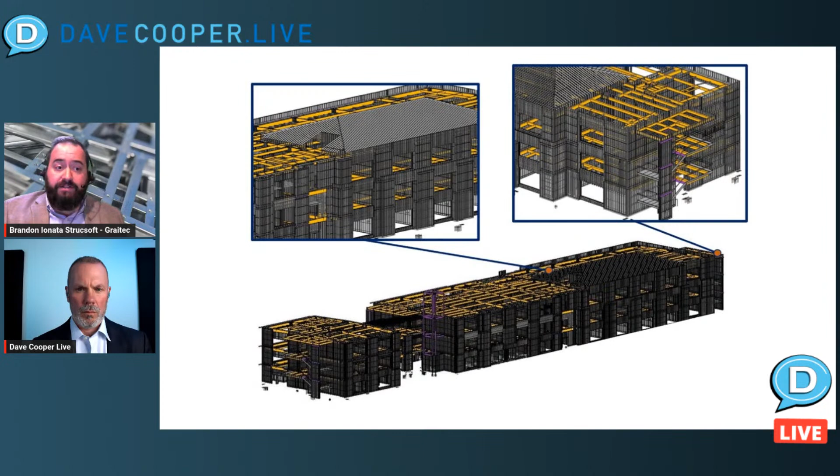Yeah, so any customer that's using MWF, essentially what they can do is we're leveraging the technology of Revit. So if we can import it into Revit, we can see it in MWF, we can frame around it, or we can create openings if there's in-wall penetrations such as hot and cold water pipes and so on, and we want to make sure that there's already holes drilled through the verticals so that we can pass those pipes and not have to do it on site. So all of that can be done.

This is the augmentation of the level of detail I was speaking to earlier, right here. I mean, amazing. It is super detailed. My guess is we can zoom in down to the last screw and bolt on that, right? Essentially, yeah, you have to figure that every single one of the connections of these members are precise enough that we can manufacture them in machine.

This particular project is manufactured through a Howick machine, funny enough. So that means that we have to essentially make sure that all of the information is there so that the Howick machine knows where to cut the stud, where to punch the hole for the screw and dimple, where to swage and where to create lip cuts so everything fits nicely inside of each other.

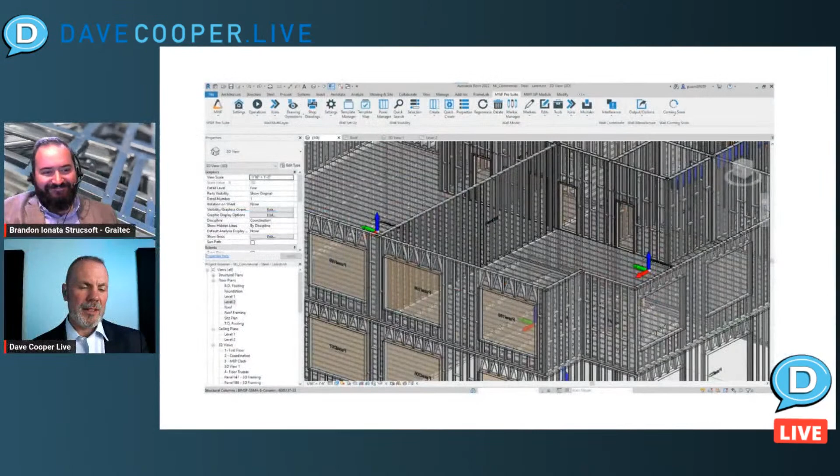Just another view of a different building, but what's interesting about this one is that this is all cloud-based. So this is Onyx, and it's our manufacturing solution. About six or seven years ago, we realized that a lot of the fine detail, so here we go again talking about routing lines for cutting sheathing or glue lines and screws and so on, a lot of the fine detail inside of a Revit model isn't necessary, right? So we saw a need to kind of extract the manufacturing process a little bit from Revit so that we can run it in a lighter and more accessible

platform. So we created our cloud solution called Onyx, and essentially what this is at its nucleus is a converter, right? So we're taking a Revit model, we're bringing it up to the cloud, we're able to see the entire model like it is here, and we output the CNC file. More importantly, though, what we're doing is we're really organizing the way we're manufacturing these wall panels, right? So what do I mean by organizing?

Well, obviously, in this view, I'm able to go in here and sequence our roll order. So roll order in the business is what panel goes after the other, right? So it's our sequence of manufacturing. So I'm going to sequence our roll order here. And from the roll order, I can then go even further and I can sequence what materials are used first, what members are put out first.

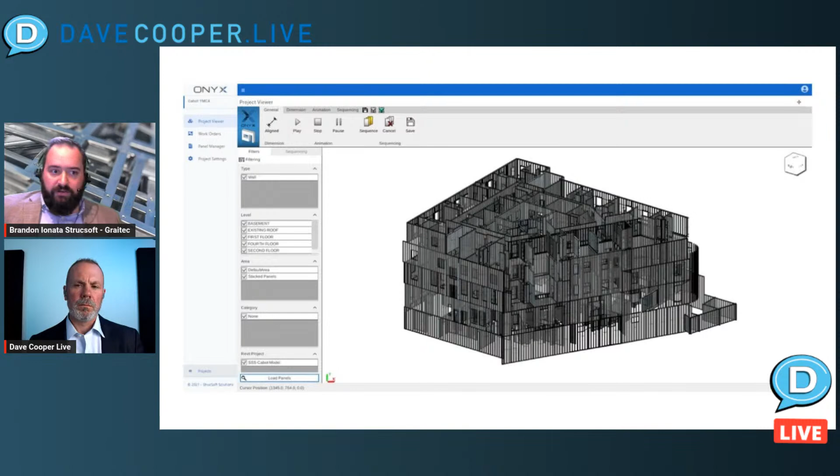And we're able to edit the operations. Now, everybody always asks me, okay, we're editing something in the panel, is that going to go back to Revit? Well, I don't need to. If I change the location of a dimple, for instance, on a stud, I don't need to send it back to Revit because it doesn't exist in Revit, right? It exists for the purpose of the machine and the machine only. So we're able to do all of that from Onyx. Wow. Very cool.

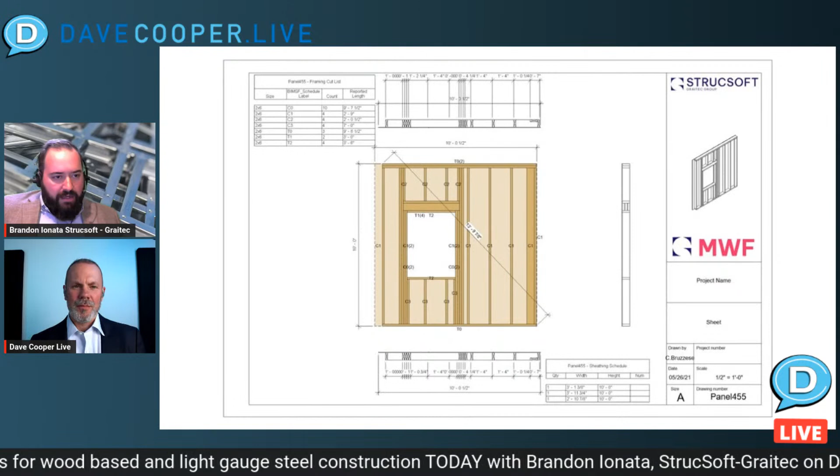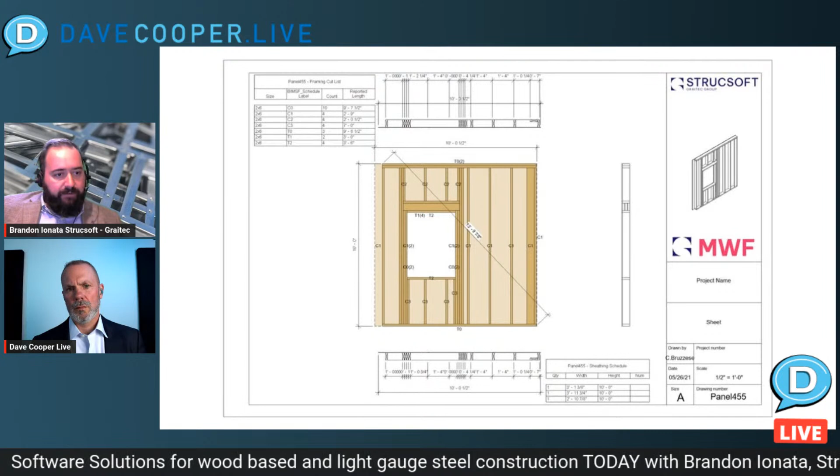These are wood, right? My favorite. This is wood. A pretty simple panel, to be honest with you. I probably could have found something a little bit more complex with some MEP in there, but either way, I think it demonstrates the necessity of software like ours in the industry. Because if we're creating something offsite, we need shop drawings or panel tickets like this. If you're going to build something in a factory, I need a visual aid to show the guys putting this together which member goes where, which piece of wood goes where, and what this panel is supposed to look like when it's done.

I also need to be able to relate my labels coming off the machine to the actual physical labels on each and every single piece of the puzzle. So a shop drawing like this is super important. If I go back 10 years, people were drawing each and every one of these by hand. That's a lot of time consumed. Here we're able to create these automatically through the software. You input your settings on how you want this to look, the visual appearance, and we're able to spit this out for every panel in your project.

So your software is going to be working with Randek machines, right? Or something of that scale. Exactly. The quality of the lumber you have to use with precision software has got to be something you take into consideration when designing. The machines aren't sitting there flipping to find a crown and seeing how inaccurate the stud is, and the 5 from the 20 go in that pile, right? How do you guys manage that, or is there a specific wood grade that you need? You definitely need a high grade wood.

If I look at some of our customers, especially on long lengths like top and bottom plates, a lot of them are using very high grade finger jointed plates that are arrow straight. And there is an additional cost to this, don't get me wrong. But the benefits are reduced waste and reduced labor on these projects. They're saving money by purchasing this material. And you're also looking at the final deliverable, the product quality. When things are fitting together real nice and you don't have wonky lumber doing an S curve through your wall, your final deliverable is much higher grade than your competitors. So it's really a benefit.

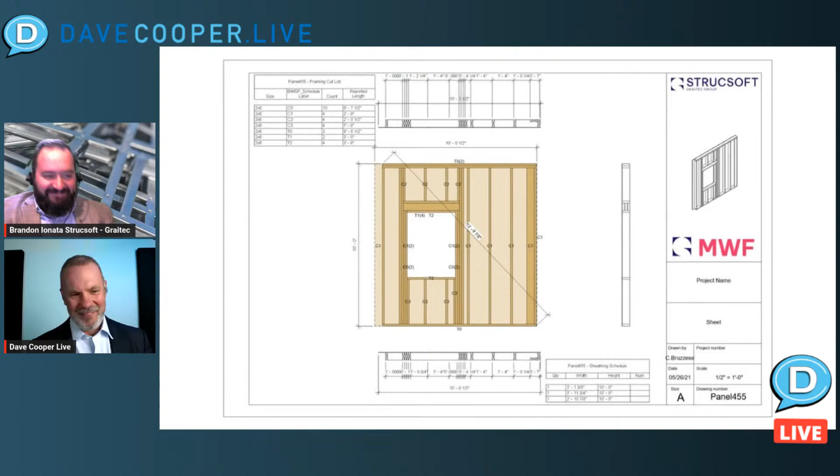There's a good example of a multi-story wood structure, and we have images of much bigger ones, but they're hard to keep on one screen. But you'll see, when we talk about framing, it isn't just the sticks of lumber. We're also talking about the sheathing components. We can obviously design closed panel systems, so framing at that point includes hardware. In structures like this, we obviously have all manner of clips, and hold downs, and anchors, and so on. But also MEP components if we're delivering closed wall systems. So framing is more than just the wood or the steel verticals.

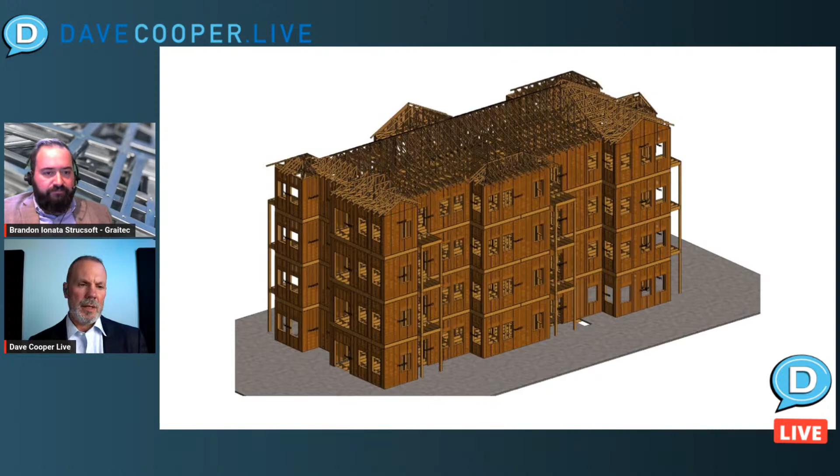Yeah, it definitely is. And the fact that you can also incorporate the MEPs into the wood structure, that's always been an issue in the past. But with technology, it's becoming easier to do that. Absolutely, and this has been the big strength of MWF, really, the fact that we're built on top of Revit, right? We can take all of the data from other trades and bring it into the model, and we're able to then leverage the data and manipulate the framing so that everything works together. If we look at competitor solutions, they don't have that ability. They're dealing with IFCs, which are questionable at best. And here we're all able to play in the same sandbox and work on the same project at the same time. It's really a huge plus for us.

Like I said, I don't want to sound like a fanboy here, and this is definitely not paid promotional stuff by any stretch with Brandon and StrucSoft. This stuff is real, and that's one of the benefits that we've had at Dave Cooper Live: we get to meet the people in the field and the manufacturers that are doing this. And I struggle with how do we get other people to really understand the financial gains that one makes having the accuracy that these systems give. And yes, you got to pay a little bit more for the product, but you got to think about the time saved, the labor saved, insurance saved, all the things that you save in the field on a job site, and less disruption to the community.